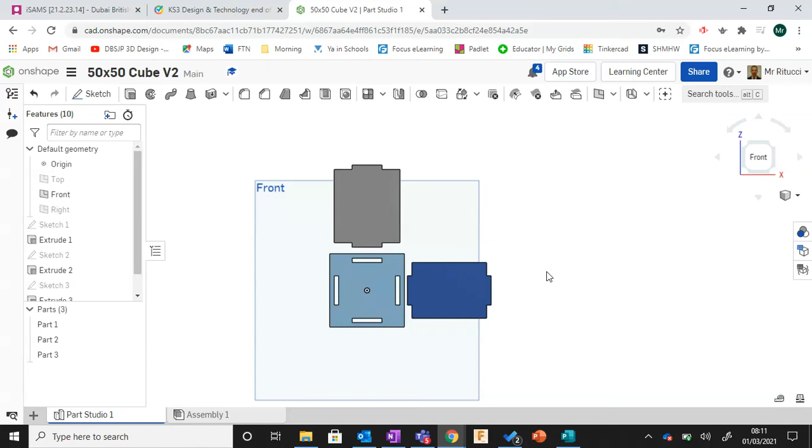Okay, this lesson today is going to be a continuation from the 50 by 50 cube task. We've drawn all the parts, we've done an assembly, bringing the parts together.

What we're going to do today is finish up the parts in Onshape, and add in these elements here - the circles and the horizontal lines, as the additional parts that go on top of the box.

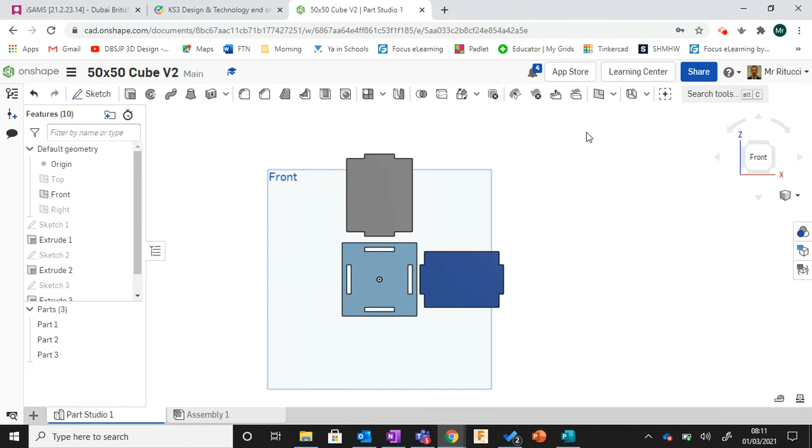To do that, we're going to create a sketch on this work plane. So I'm going to go to sketch, click this work plane and press N.

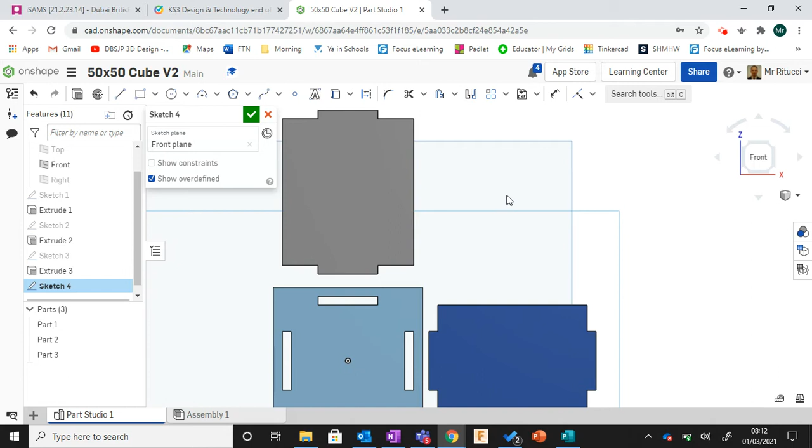Now the first cube, the first flat bit of the cube is going to be 50 by 50. That does not need to change because it's going to go on the top and the bottom of the cube.

So to do that, as we know, it's pretty straightforward. Just draw your rectangle, type 50 into 50, and that draws that for me.

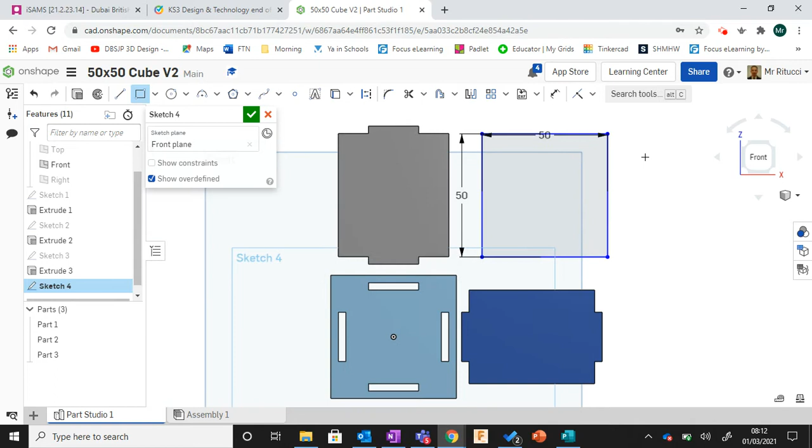Now, for us to draw the circles, we're going to use the pattern tool. So, center point circle, and we're just going to roughly draw where we want to have a circle - let's say about here.

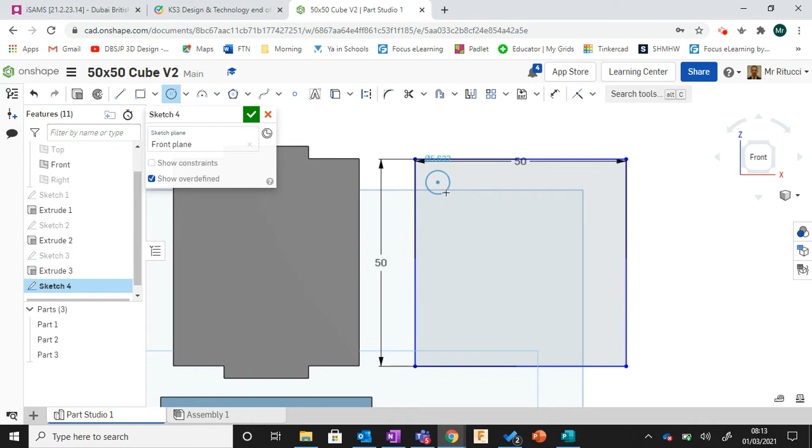I can't remember what the original size was for the circle, but I'm just going to do it by eye. Probably let's go for 6 millimeters, round it up, like that.

Now the important thing with this is we don't want to have it too close to the edge, because when the laser cutter cuts, we need to make sure there's enough material between that, so it doesn't break off or get thin.

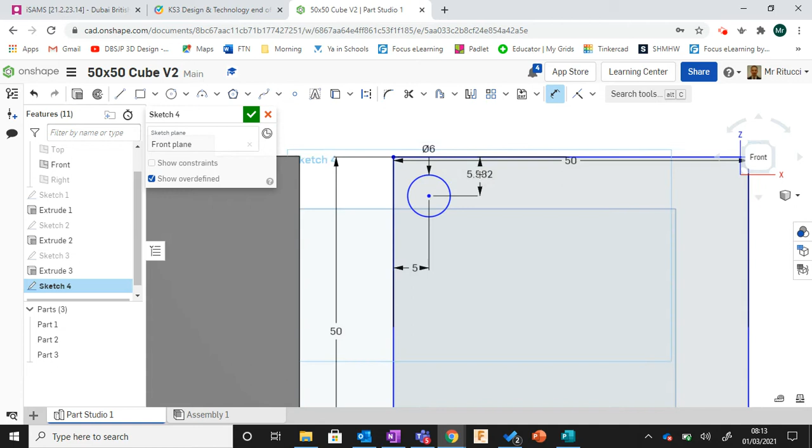So I'm going to leave a 5 millimeter gap from here to here, like so. That puts it at 5 millimeters.

What I'm going to do now is use the pattern tool - again, pretty straightforward to use. Just escape to clear any tools that may already be active. It's always good to check everything's clear up here. Press escape, and it deactivates all the tools.

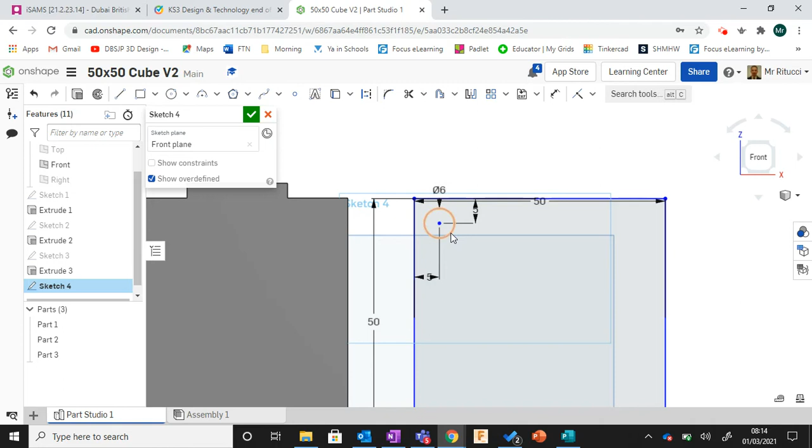What we do now is click the circle, and then click the pattern tool, and I want to have a linear pattern. It already pops the circles in.

It says, do you want 3 across, spaced between 25 millimeters, and do you want 1 above? Now, what I do as a good habit is flick that down first, because you can forget about that one.

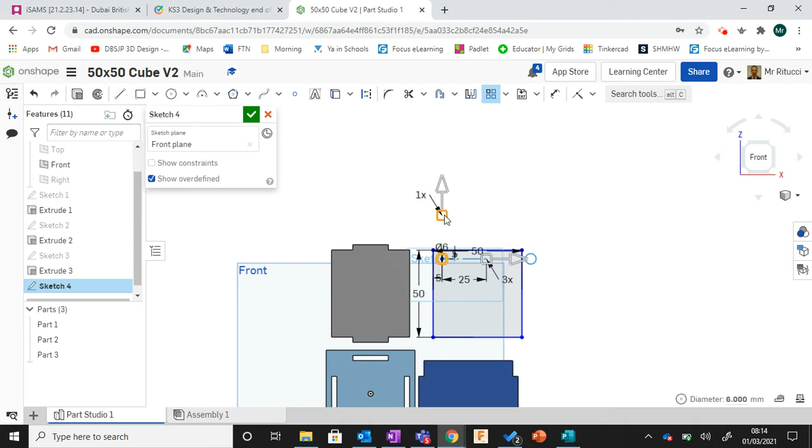And I'm going to increase that to 6 and press enter. I know that's miles off at the moment because I need to adjust a few things.

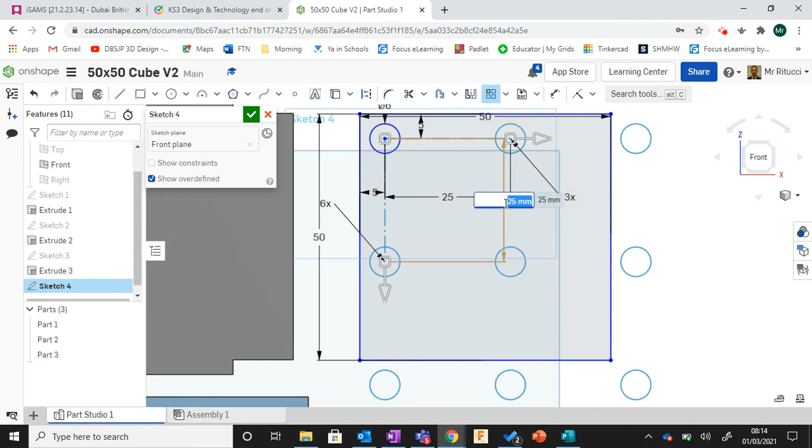So I'm going to adjust the distance between here and here. It's 25 at the moment, so I'm just going to do it by eye - let's see if 5, that might be too tight. Let's double it up to 10, see what happens. Okay, 10 would be about right.

I've got 1 extra there, so what I'm going to do is say I don't want that one - I don't want 6, I want 5. Enter. Okay, and that gets rid of that one.

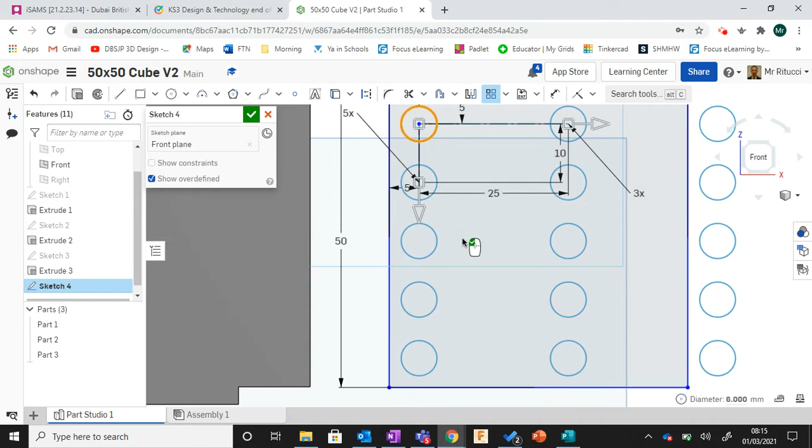And now I just need to sort out the distance between the two. With that, I'm going to do the same as the one, put 10. Okay, and what I might do as well is increase my...

Half that one actually, I'm going to put 5. And, wrong one.

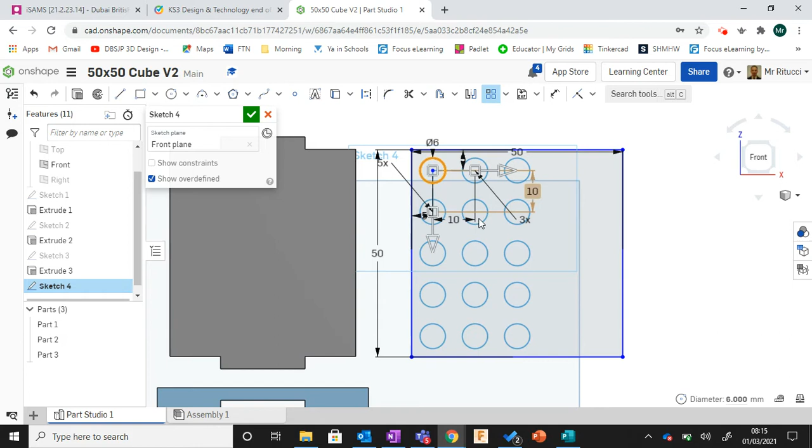Let's see the one I want to change, this one, like that. I need to think, okay, I've got 10 between there and there, 10 up and down. I've got a row of 5 going down, and I've only got 3 here. So I wonder if I can get 5 in there as well, like that.

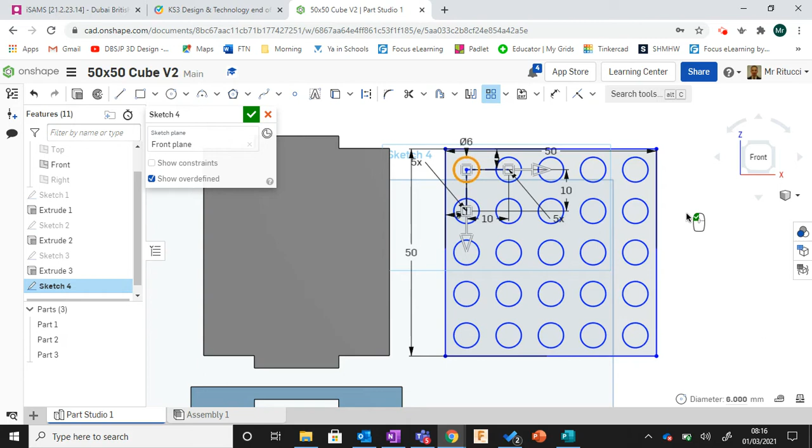Now what I can do here is I can okay that, and just double check to see if it's in the center. So if I measure from here to here, okay, it's 5. So I've got 5 either side. That's worked out perfectly for me.

So 5, 5, distance there, that should be okay. And it's got enough distance all around, so when it laser cuts, that's fine. So I'm just going to click OK with that.

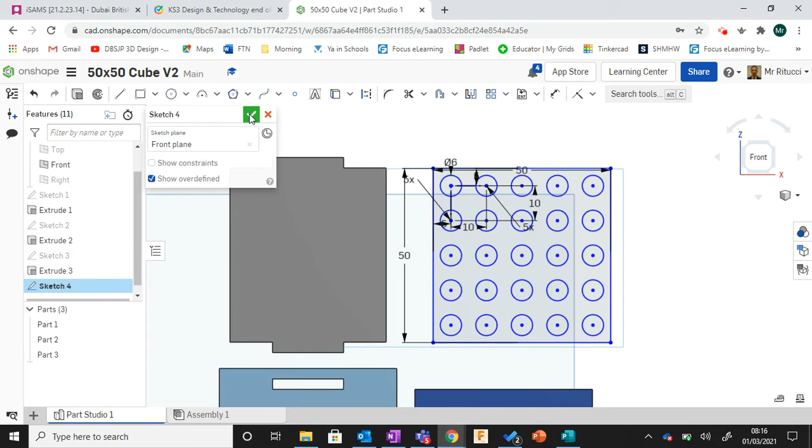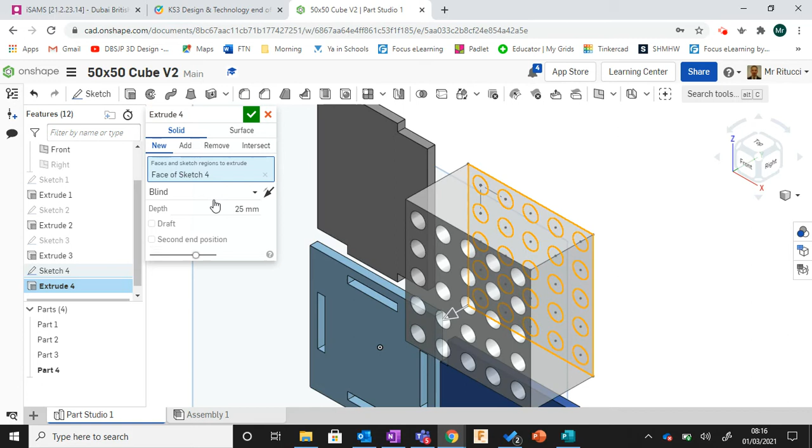And then what we're going to do is, just as we always do, isometric, and we're just going to pop the extrude onto there. Make sure it's a new part, not adding it to the existing drawing. So do that, and then I'm going to change it to the thickness of the material, which is 3 millimeters. Click OK. So that's the part done.

Now what we need to do is we're going to basically do the other piece. So let's just reference the drawing again to see that. So we've just done that piece. So it's 50 by 50 because it's the same size of the box.

Now this piece here needs to be a little bit different. If we look at the measurements, we can see that it needs to be 50 across, like that, but we need to make the distance 44. That's because the material thickness is 3 millimeters here and 3 millimeters there. That's a total of 6.

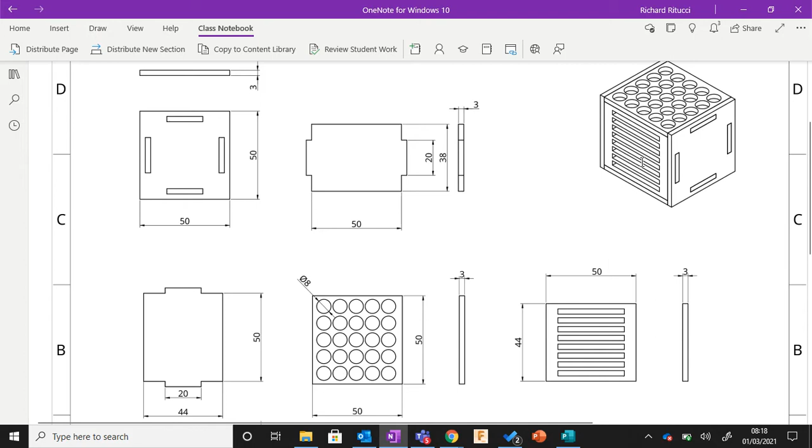You take 6 away from 50, it will give you 44. So we need to account for this material thickness here and here, and this being able to just slot inside. So that's one thing you need to think about when you are creating things like this, how things butt up to each other, and how you have to do the correct sizes so things will fit in. If you don't get it right the first time, you can go in and edit the sketch afterwards. It's not a big problem, but it's good to be aware before you do it.

So we're looking at 50 across by 44 high. So let's do that now.

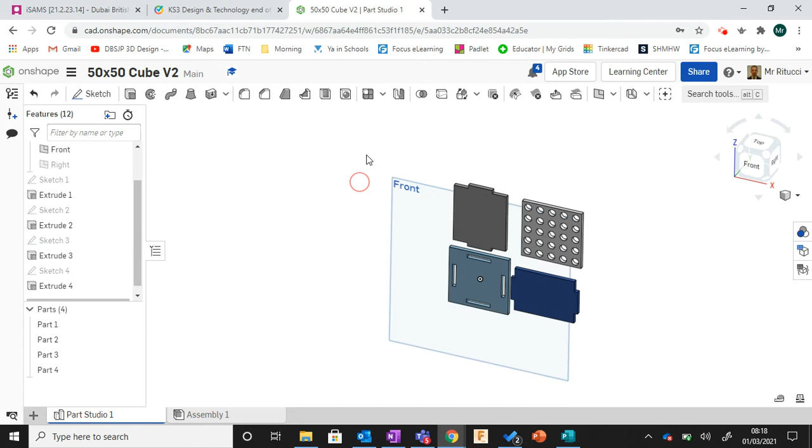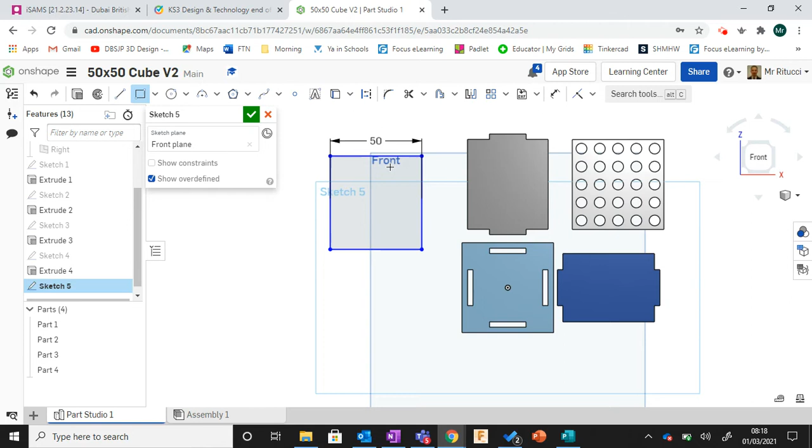Let's go into here and let's do the same process again. So we're going to go to the sketch, click N, and what I'm going to do is I'm going to use the rectangle tool here. I'm not using the center point rectangle because that doesn't work for this. So I want 50 across, and then press enter, and I want 44 there, press enter.

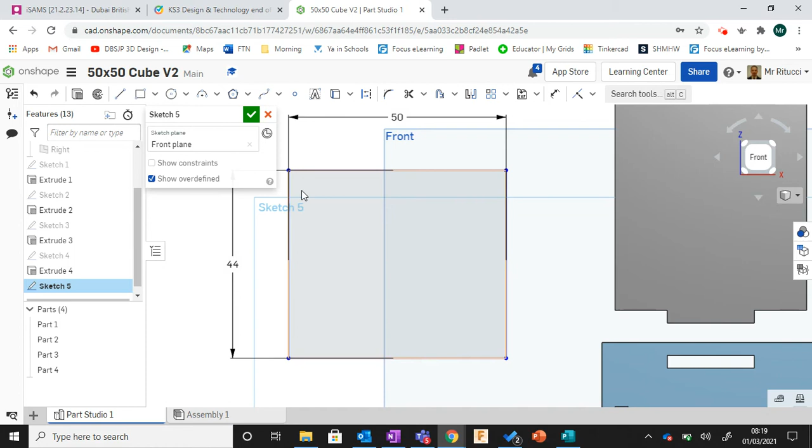Okay, so we're going to do the same thing as before, and we're going to draw a line going through here. So to do that, I'm going to get a rectangle, and we're going to just draw, actually what we'll do first is we'll make it easy.

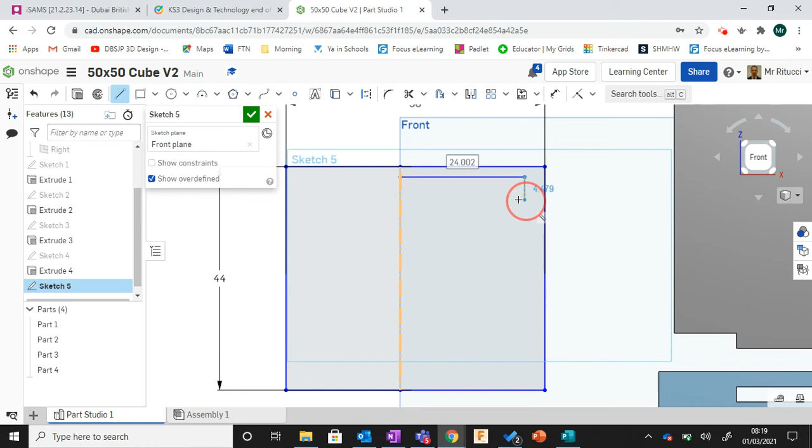We'll press Q and we'll draw a center line straight down the middle. And what I'm going to do is I'm going to draw it so it is half of it. Draw it roughly, like so, and then like so. And again, with Onshape, there are numerous ways to do the same thing. But what I'm doing here is I'm just drawing half of it and I'll flip it over. You could draw the whole thing, but this is an easy way to get it in the center.

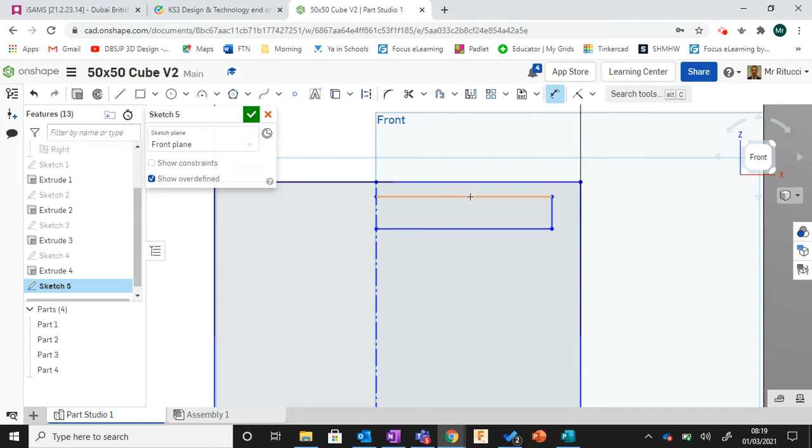So what I'm going to do now is I'm going to use the dimension tool, and I'm going to dimension the distance from here to here. Okay, I want to have that as 5, like so. Maybe not 5 actually, 5 is a bit too much. Let's go for something like 3. Okay, 3. Let's see what this is as a total distance. Again, I'm going to make it so it's a whole number, like 24.

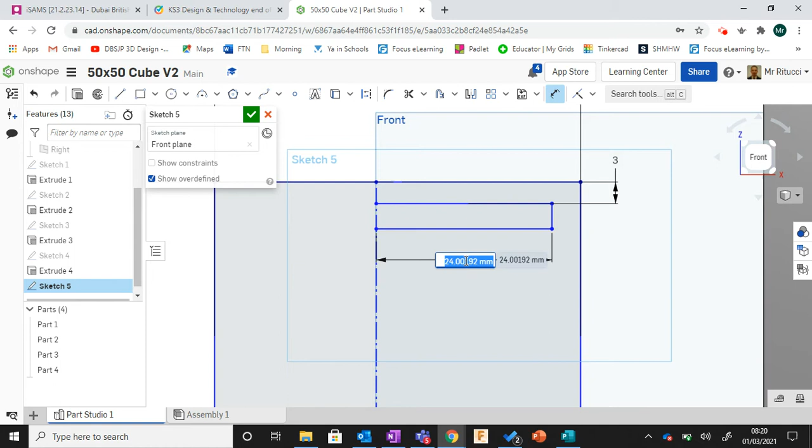Okay, perfect. What we're going to do there is mirror it over. So we'll use the mirror tool, select the line of symmetry, and let's flip that for there.

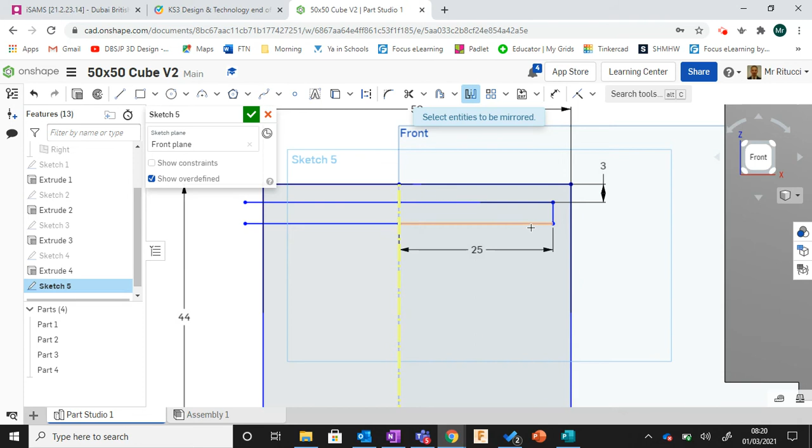Oh, I know why that's happening, because that line, I don't think that's the center line. That's interesting. Okay, so let's have a look. This has lied to me. Okay, this is not the center point.

So we need to just adjust that slightly. Let's have a look. Let's measure from here to here, and let's measure from here to here again. Okay, definitely not the center line. Should have been more accurate there when I did my drawing.

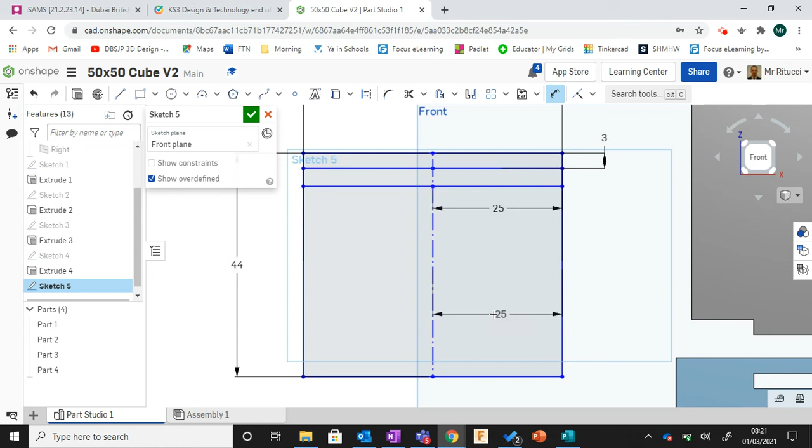Okay, which now means we just need to adjust a few things. So let's change that to 20. Okay, and there we go. So again, you can see with Onshape, if you make mistakes, we can fix it very quickly. It's just a case of changing dimensions, being aware of things.

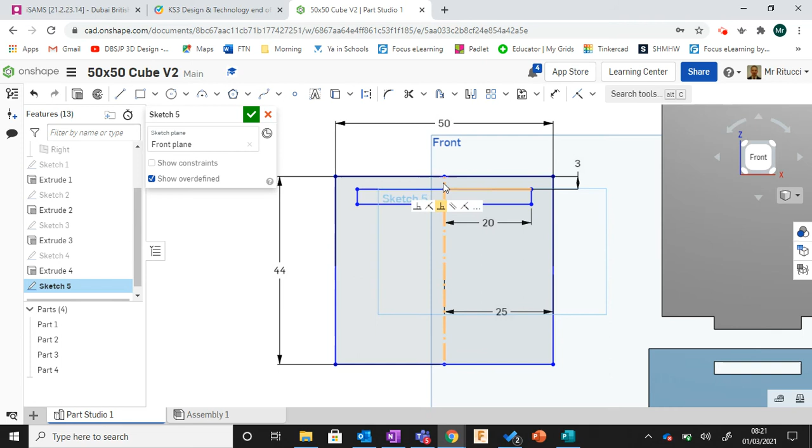The mistake I made there was I just put the center line in, I didn't take note of the little indicators it gives you when you highlight other lines.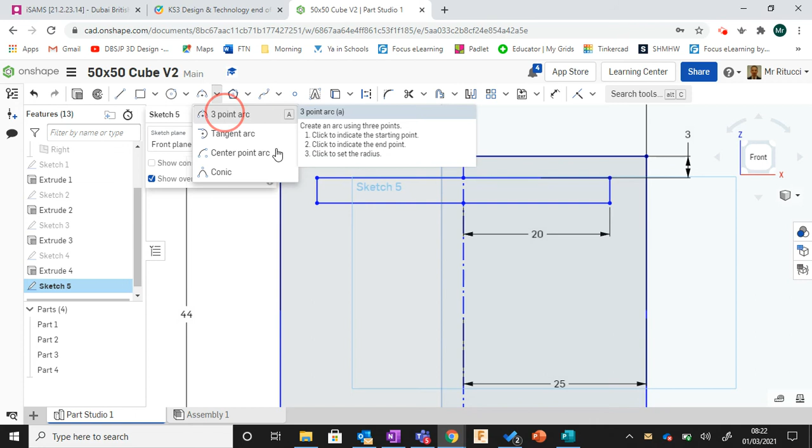So what we're going to do now is we're going to use the tool. Actually, what I'm going to do with this one, I think, is I might just add in a 3-point arc. Let's see if this does. Yeah, I might just do that.

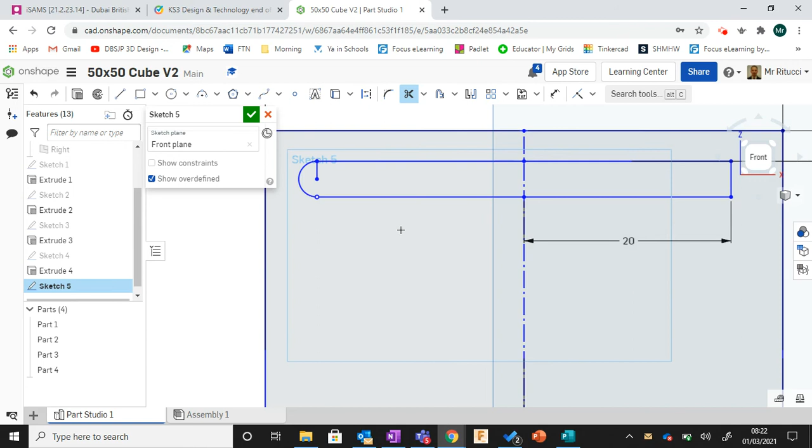Okay, just as a bit of a feature, a little 3-point arc in there, and I'm going to delete that out there and there. And what I'll do is I'll just mirror that over. So let's select the line of symmetry here, and let's mirror that feature over and snip that out.

Okay, so we've now got a nice sort of rounded corner now in our slot. So what I'm going to do now is I'm going to create that as a row going down.

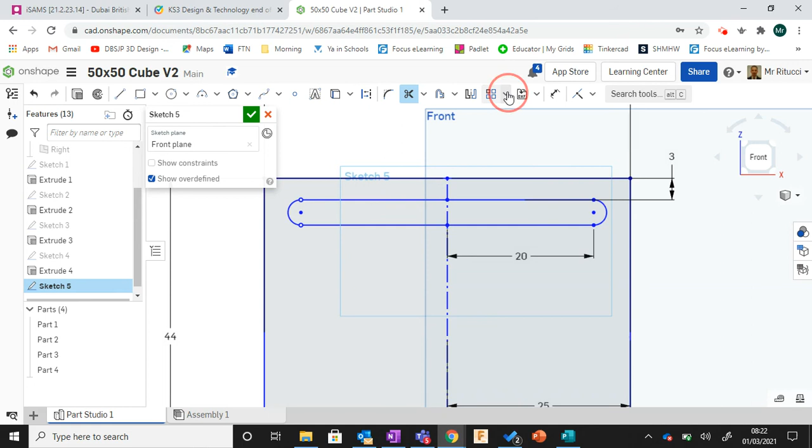So same thing as before. Rather than, we're going to use a linear pattern this time again. So for that, we're going to select all the geometry we need: that piece, that piece, that piece, that piece, that piece, and that piece. Now, what it does, as you can see, is it's assumed I want to go across. So it's put me 3 across.

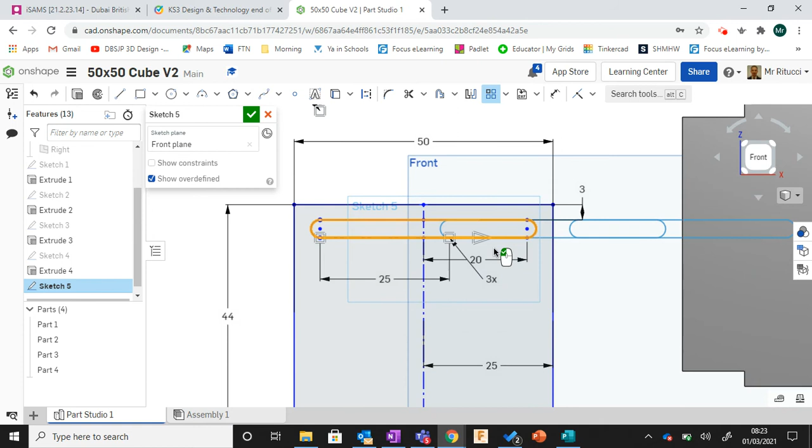Okay, now with that, I don't want to go across. So I take this times 3, I just change it to 1. Okay, because that now is telling me that I've only got 1, but I want to do more going down.

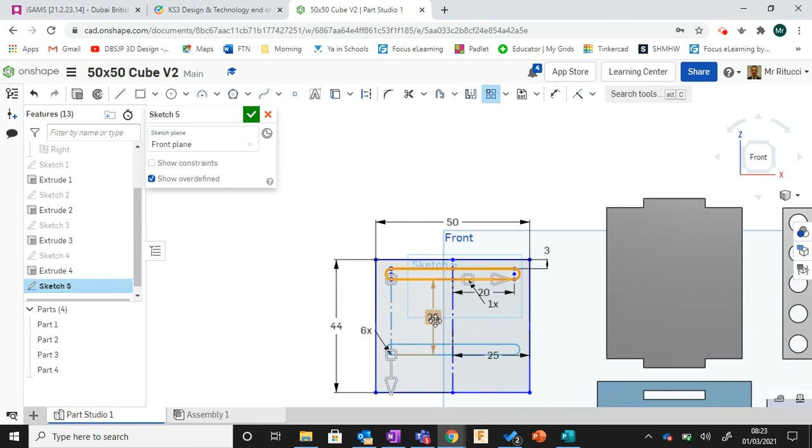So I'll flick the arrow going down, and I'm going to change that to, again, let's see what 6 looks like. Press enter. I've got a massive gap between them, 25. So let's change that to maybe 10. Again, a bit too much there. Let's go to 5 maybe.

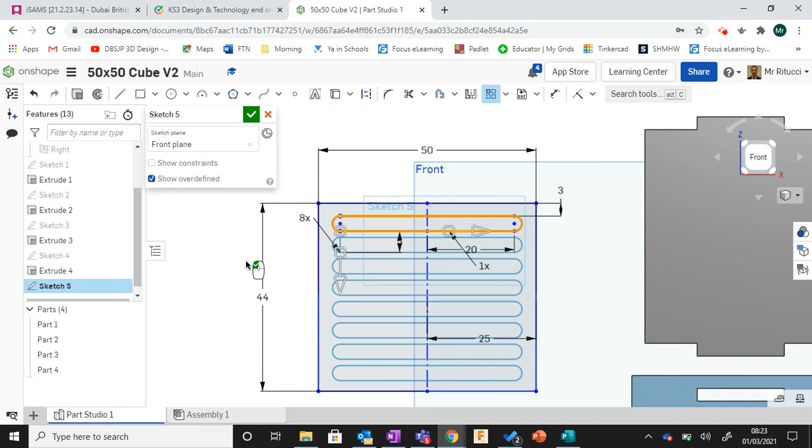Okay, that's what I want. So, and again, I want to increase it now. So I've got 6, maybe 8. Okay, there we go. So that's 8 there. And we're going to click OK, like that. Right click to confirm.

So now what I've noticed is that this distance between, that's 3 from there to there, but if I measure that from there to there, that's not 3. Okay, and if I do that.

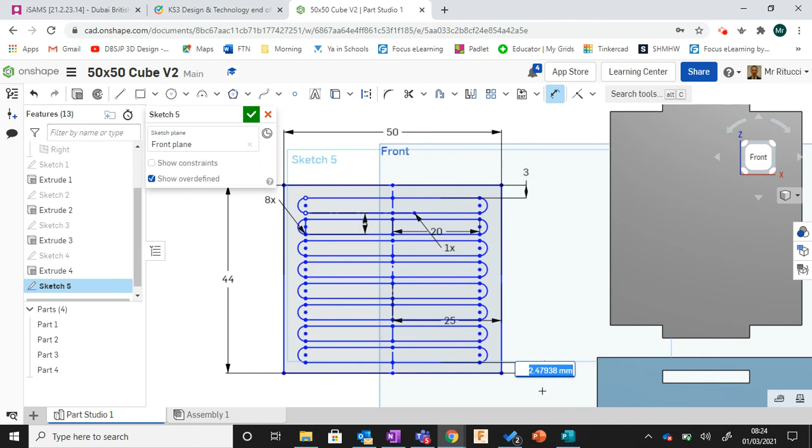Okay, it allows me then to recenter everything. So everything now is recentered. So 3 there, 3 there. I know that's the same distance across from there to there because I use the center line. That is nice and accurate, and we can finish that piece.

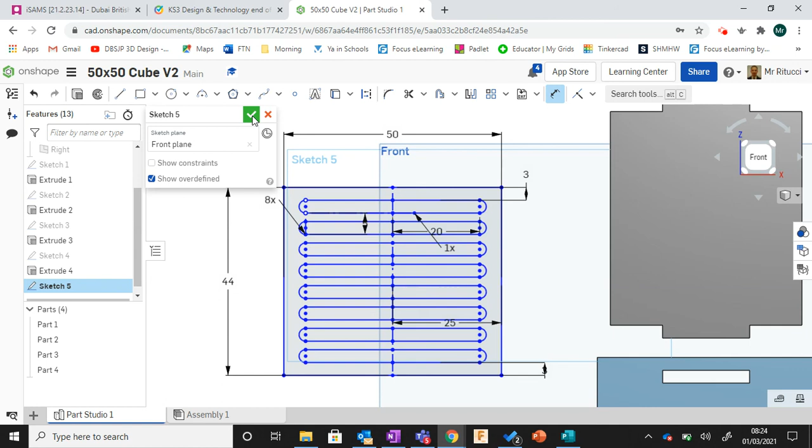Okay, so what we'll do now is, I just noticed, nope, that's a construction line, that's fine. I'm going to go to isometric, and we're going to then

extrude these parts. So make sure you select all of it. Make sure it's a new part and click 3. There we go.

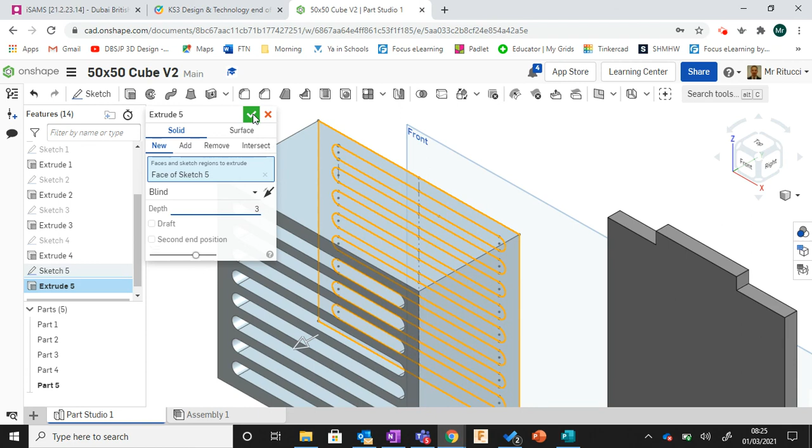Okay, so now if we have a look at our front, we have all the pieces that we need to construct our final assembly for our cube.